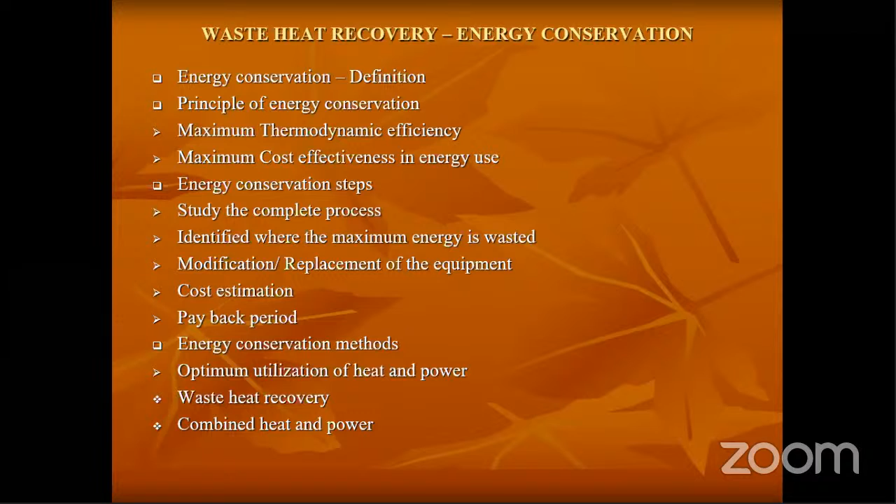Sir, say it once again. There are three switches present on the ground floor. Okay. You can go and see the switches. Now you go to the first floor. There are three bulbs present. You must say which switch corresponds to which bulb. I'll give you only one chance to see the switches, and you will not come back. Three bulbs are fitted on the first floor, three switches on the ground floor. Do whatever you can with the switches, but you must say which switch corresponds to which bulb.

Okay, so I will tell you the answer. The concept is waste heat recovery or combined heat and power. I go to the switches. I switch on the first switch, wait for 5 minutes, switch it off and switch on the second switch. Now I go to the first floor. The bulb that is burning corresponds to switch 2. Now you touch the surface of the other two bulbs. Whichever bulb surface is hot, that is switch 1, because I switched it on for 5 minutes, then switched it off.

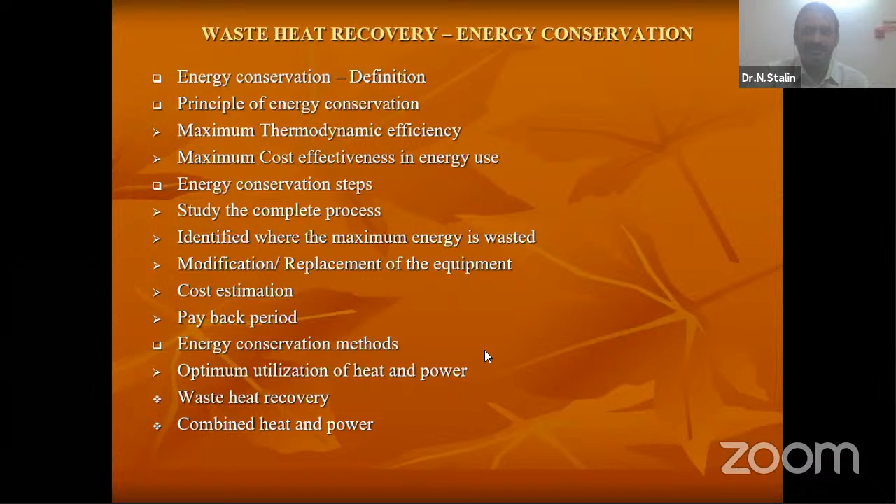Wherever you have waste heat, that has to be utilized as a useful form of heat. Waste heat recovery in industry is classified into three ways: high temperature range, medium temperature range, and low temperature range. The high temperature range is above 1200 degree Fahrenheit. Medium temperature range is 450 to 1200 degrees. Low temperature range is below 450 degrees Fahrenheit.

This is how the amount of heat emitted from different sources is classified based on heat available. For example, high temperature waste heat is available in aluminum refining furnaces and solid waste incinerators. Medium temperature waste heat is available in heating furnaces and gas turbine exhaust. Low temperature waste heat is available in cooling water from internal combustion engines and process steam condensate.

If you take your home, when staying in an apartment house, you can put one collection point in every home. Whatever coconut is used, every home uses coconut. After taking the inside part, they throw the coconut shell. The coconut shell has higher calorific value compared to any other fuel. You can use this coconut shell and make a small boiler at a cost of hardly 2000 rupees, an aluminum boiler is enough.

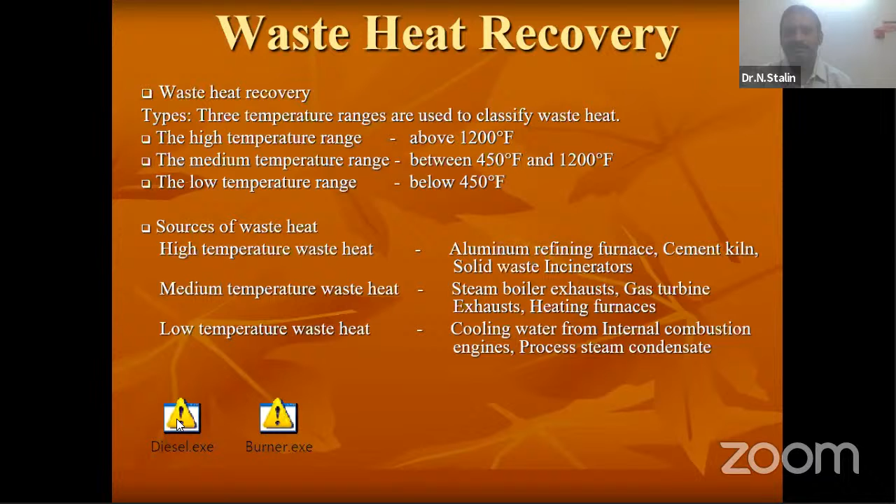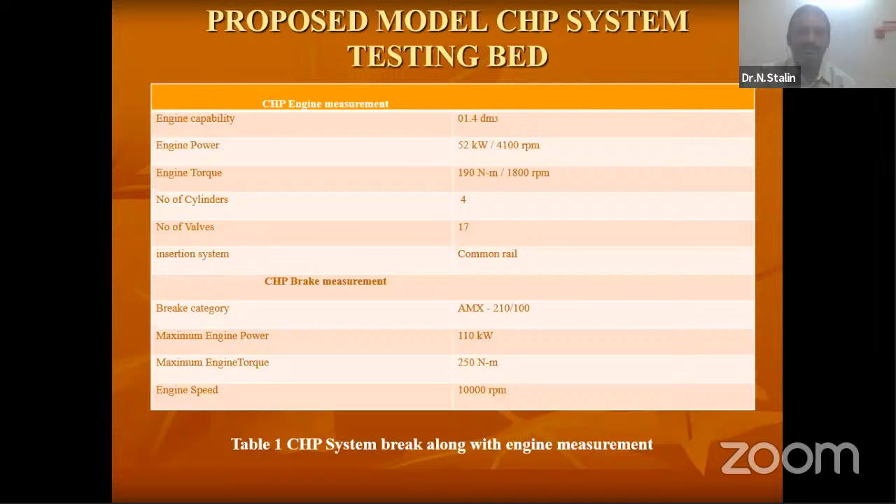Now in industry there is a diesel engine. Day by day you are using a diesel car or whatever transport. This model which I proposed for reducing pollution to the environment has a CHP engine capacity of about 1.4 dm3, and engine power of 52 kilowatt at 4100 rpm. In this engine bed, to reduce the waste heat, I put a heat exchanger.

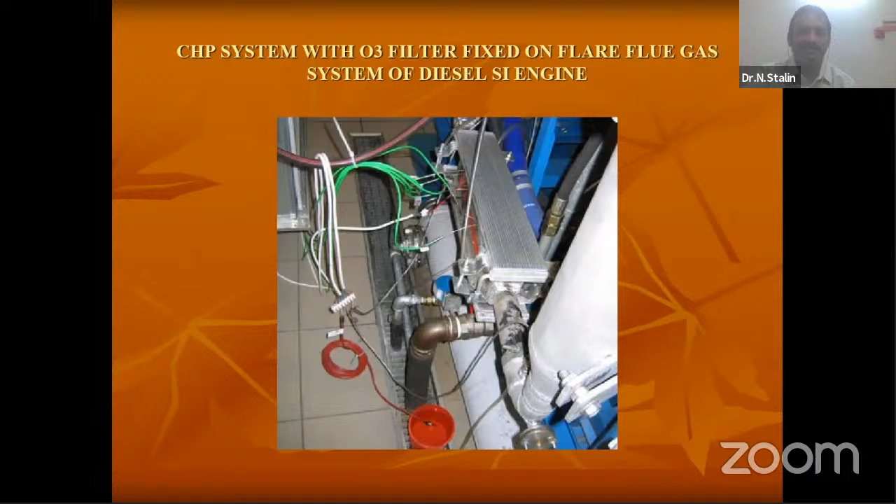That heat exchanger is used to recover the heat. This is a view of this heat exchanger, used to recover the heat, and that heat can be used for converting our tap water into distilled water. Once you have a diesel car at home, based on the flue gas outlet, I designed a shell and tube heat exchanger. I fitted that shell and tube heat exchanger at the outlet of your exhaust without affecting the flow of exhaust. Because of that, I chose a shell and tube heat exchanger, so this heat can be used for converting your tap water into distilled water.

So there will be a small tank I have provided. It acts like a condenser. Whatever tap water is provided inside the heat exchanger gets heated up. When you run the car, it gets heated up and converted into steam. That steam moves to the top, and the condenser condenses it. The liquid accumulates in the condenser, so once you stop your car, using the drain valve, you can take the distilled water.

So that calculation I made it. Diesel engine thermal efficiency is 40%. The available heat is 60%. Diesel car has an air fuel ratio of 15 is to 1. So mass of the exhaust leaving from the engine is 15 plus 1, 16 kg of flue per kg of fuel. The engine exhaust temperature is 600 degrees centigrade.

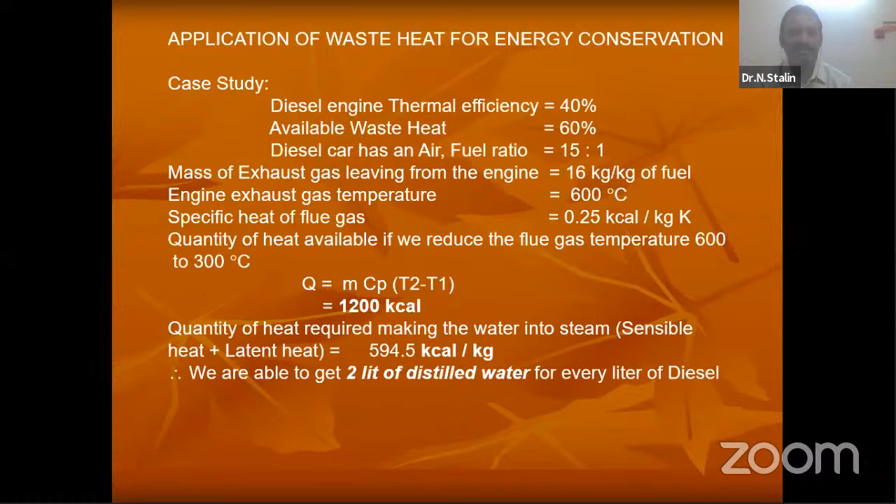The distilled water cost is 20 rupees, so 2 liters is equal to 20 plus 20, 40 rupees. Your 1 liter cost of diesel is 75 or 70 rupees you take. So 40 rupees is a saving. The remaining 30 rupees you have to save in your pocket.

So like that, you can do this type of energy saving concept in your home also. So what way can you do the energy conservation concept?

Most probably people find it very difficult to get LPG gas, liquid petroleum gas, because it is kept in a 14.2 kg cylinder, and people feel the gas consumption is high. Normally the cylinder has to last 60 days, but now it's coming to 15 days. The cylinder gets over because during the corona period, everyone is staying at home and the consumption is high.

So how can I control the consumption and flow of LPG usage? One method is, as per the law, when there is a flow of fluid inside a tube, if you provide a magnet over that, an EMF is produced. So once there is a flow of gas, if you make a magnetic field over the flow of gas over the tube, then the flow becomes very slow as it moves from the cylinder.

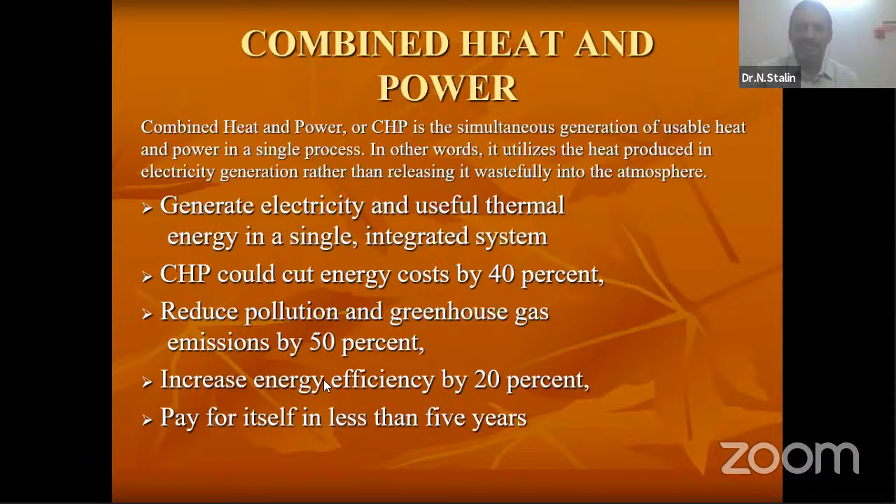The first one is to generate electricity and useful thermal energy in a single integrated system. By using the exhaust heat, you can also reduce the energy cost by 40% and reduce the pollution. Once you recover the waste heat, you can reduce the pollution by 50% and increase the energy efficiency by 20%. These are all the effects of combined heat and power.

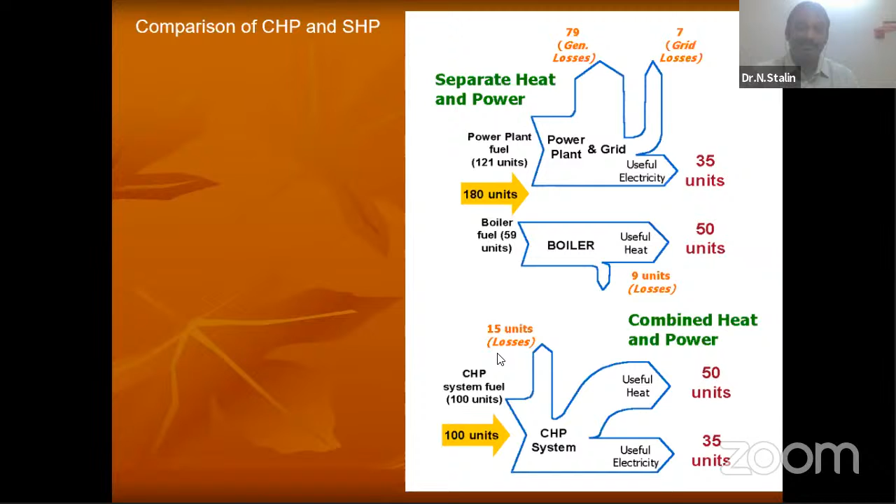Whereas if you use only 100 units of input in the CHP system, the output you are getting is 50 units of heat and 35 units of power. So the given input is only 100 units, and here you are getting 85% efficiency. So CHP, combined heat and power, is the best compared to separate heat and power.

This is traditional versus micro CHP system. In a traditional system, you can get only 57% efficiency, NOx is 0.2 pound per hour, and CO2 is 120 pound per hour. If you take micro CHP, traditional is only 57%, whereas micro CHP is 75%.

This works based on combined heat and power. NOx is reduced by 10 times, from 0.2 to 0.02. And CO2 is reduced from 120 to 90. So CO2 will reduce, NOx will reduce, and efficiency is improved.

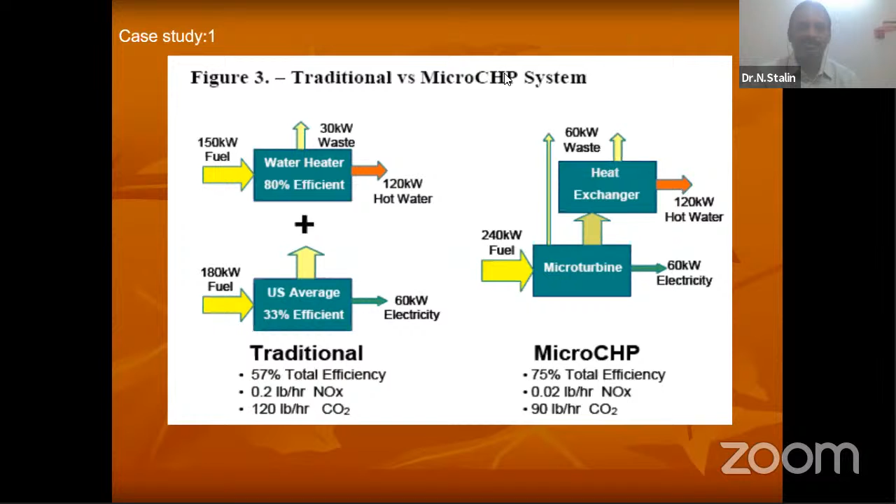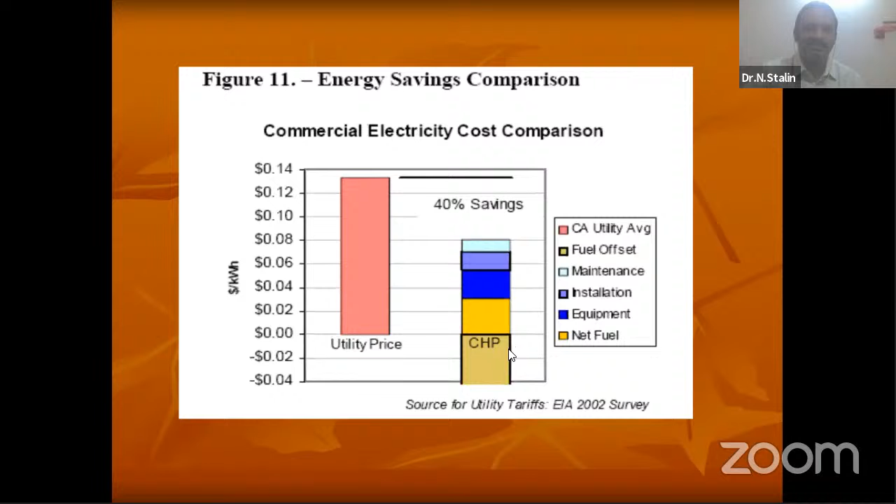So the CHP system is the best system for energy economy. The energy saving concept is that 40% energy has to be saved in CHP compared to the traditional system. This is also the best example of heat recovery, waste heat recovery in industry, for energy conservation.

As you know, people go to attend a marriage or any functional party, and by the nature of the mind or heart, they used to take more food, whether non-vegetarian or vegetarian. What happens is their stomach will bulge 2 or 3 centimeters away from the body. It means naturally, based on tendency or taste, you are having more food. So what happens is you feel indigestion because you are taking more intake.

So what way can you digest the food easily? Either you can use some ingredients like vethelai as a catalyst, or you can use hot water, or you can use some carbonated drinks like Pepsi, Coke, or anything, so it gets digested easily.

So the principle is, whenever you take food, if you want it easy to digest, the catalyst, as an example in your body's concept, the renin or the saliva is very important, and the temperature is very important. When the climate is more cold, you feel, sir, I just now took food, but it will not get digested.

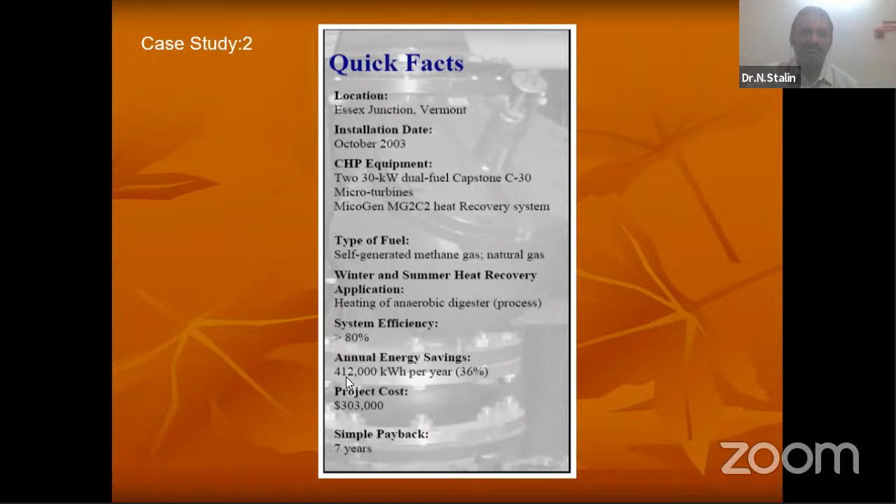So like that, the CHP system is used for preheating or increasing the heat of the anaerobic digester, and also the production of gas is high. By using the waste heat, the annual saving is about 4 lakh 12,000 units of electricity per year. The cost is almost 3 lakh 3,000, and the payback is 7 years.

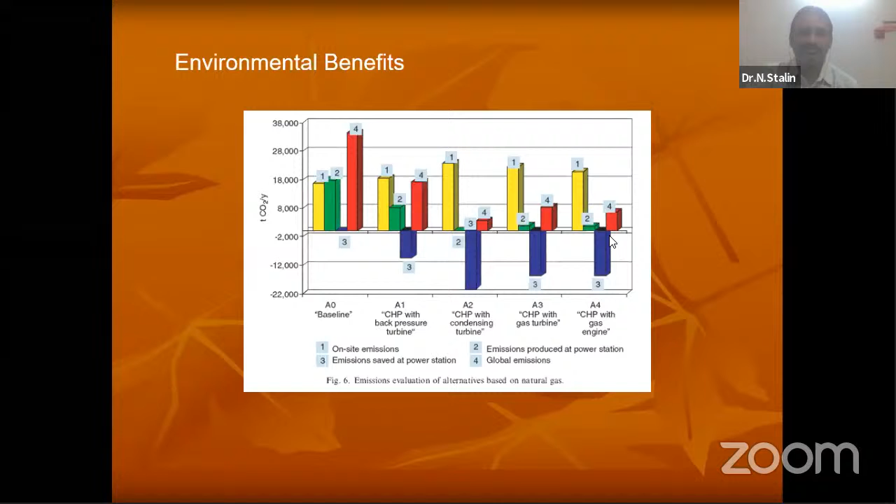And also, when you take the CO2 emission to the atmosphere, if you use a CHP system, the CHP with back pressure turbine, CHP with condensing turbine, CHP with gas turbine, see these blue lines are CO2 emissions prevented. So this is the best one, the CHP method. So this is a combined cycle process.

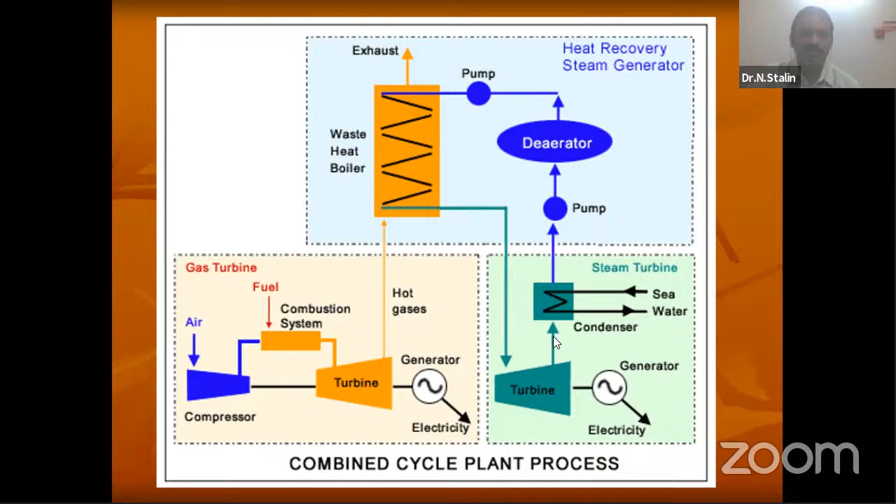You are extracting the waste heat available from the turbine and using it for production of distilled water, and also steam generation. This generated steam is used for converting into power. And this waste heat available in the boiler is used for preheating buildings in foreign countries. And this is a cogeneration power plant, the CHP, combined heat and power.

Say an example, in the sugar industry, people take the sugarcane, take out the sugar juice and put it in the boiler. In the sugar mill, the waste they generate is bagasse. So what is bagasse? Bagasse is one of the solid wastes produced in the sugar industry. This solid bagasse is used as a boiler fuel, and using the bagasse they generate steam. That steam is used for production of power.

So all the sugar industries do not belong to the Tamil Nadu Electricity Board or any electricity generation board. The company itself generates the power, and the power is utilized in running the sugar industry. And also, if there is excess power, it has to be supplied to the grid.

Okay. See now, as I know, the fermentation process happening in Tamil Nadu is in one of the hectic positions because of quick fermentation. In the sugar industry, the molasses waste goes to the production of alcohol. But alcohol production is an autocatalytic reaction. The autocatalytic reaction requires 30 days to complete. So if you want complete production of alcohol, you need to provide 30 days time.

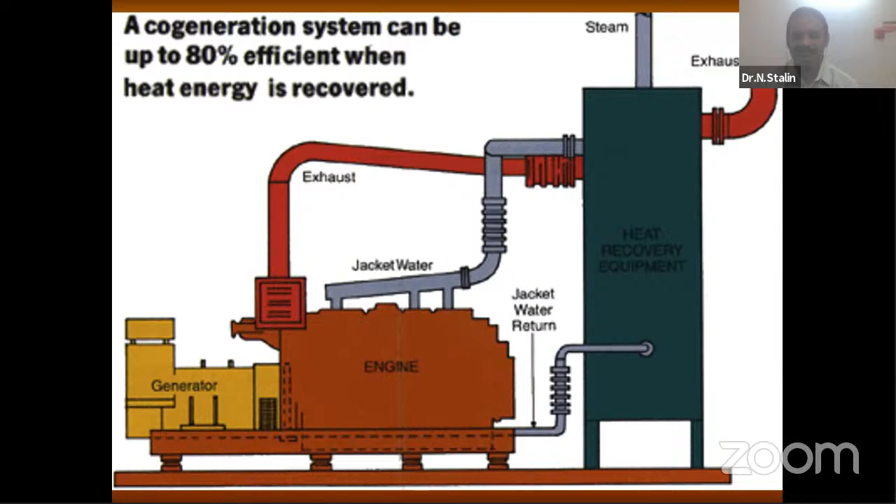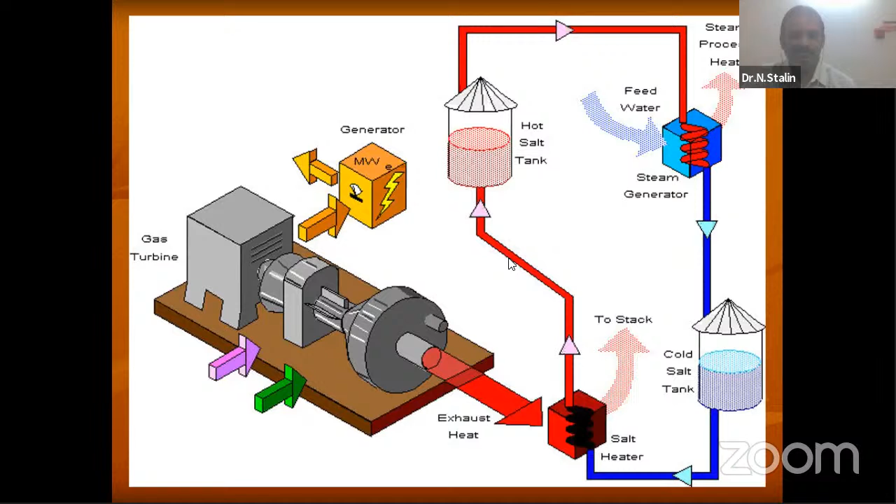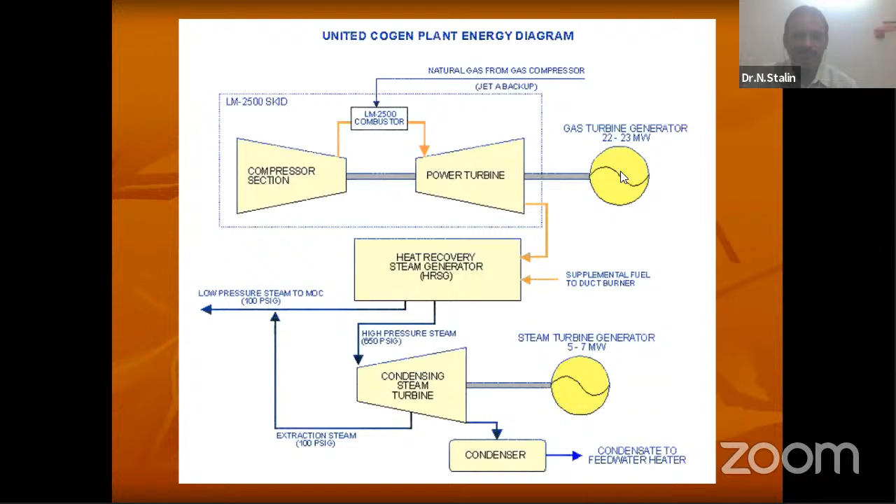So compared to these, the overall efficiency is improved by 10%. So these are the three systems used for energy conservation: one is a reciprocating engine, another one is a fuel cell, and the micro turbine. In the reciprocating engine, the input is only 100 units. You are getting electricity 40 and heat energy 50.

Instead of reciprocating, if you go for separate heat and power, you have to spend 200 units of input for a given 100 unit input. So it is almost doubled if you go for separate heat and power. Like that, in the fuel cell the given input is 100; here it is 197, but the output is the same. So in separate heat, instead of 100, it is doubled.

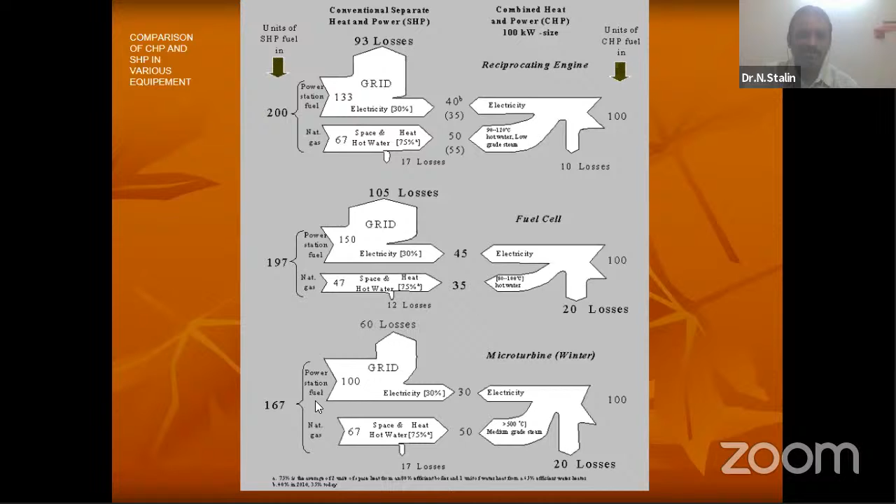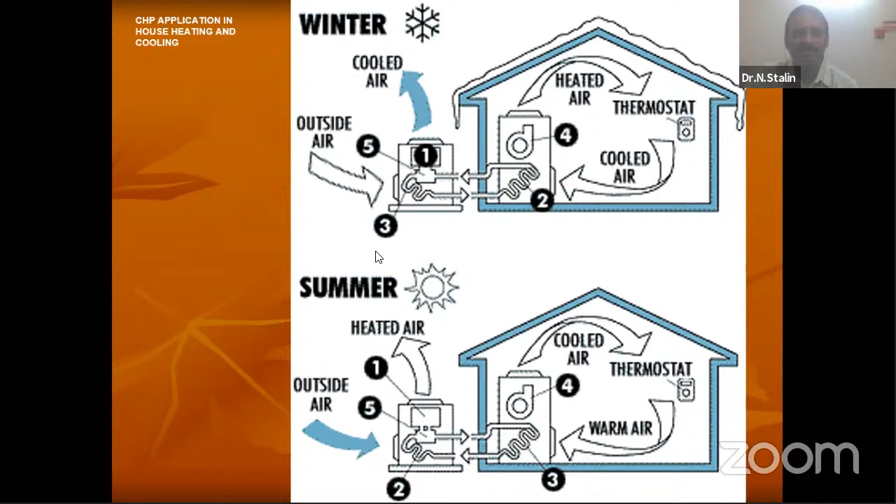Like that, in the micro turbine, the given input is 100; where it is separate, it is 167, but you are getting the same output. So compared to all in the process, the best is a CHP system, combined heat and power system. Whatever exhaust is available is used for heating the building, or by using the heat engine you can cool the building. So two ways you can do it. This is one energy conservation opportunity in industry.

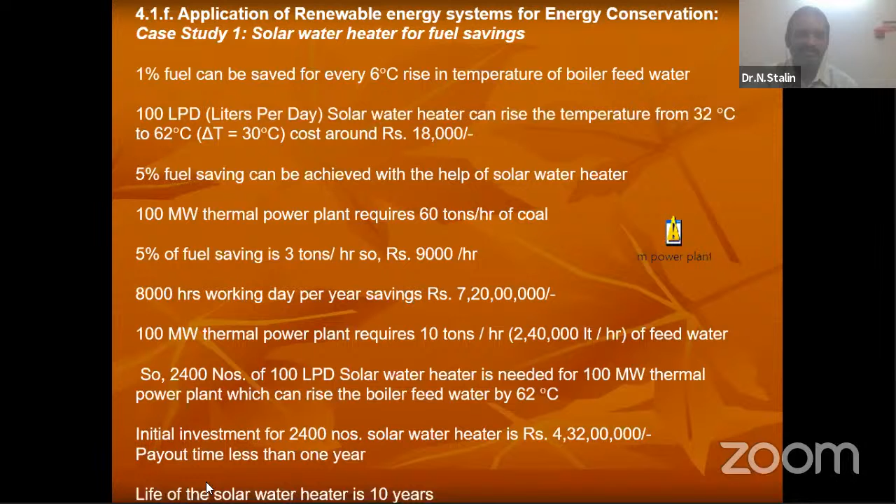Whenever you use a thermal power plant, the inlet temperature has to be raised from 30 to 60 degrees. We are using a solar water heater to increase the temperature from 30 to 60. The investment is 4 crores 32 lakhs, and the saving is 7 crores 20 lakhs. So initial investment divided by saving, the payback is less than 1 year. This is a way you can do energy conservation in industry. And this is very important.

Solar photovoltaic system. Suppose you want to put solar electric power generation in your home. Nowadays, the government has given subsidy. You can put it in your home or in an irrigation field also. In the irrigation field, in Periyar Maniammai University, they already established this solar power system. They have a solar park also, a solar gasification system, and a biogas plant also.

So like that, you can make solar power generation in your home, and in your irrigation field you can put a maximum of 5 HP solar pumping system, and for that the government has given subsidy. This is a small calculation I made for putting a solar photovoltaic. For example, in your home you use fridge, fan, TV, mixie, grinder, tube light, pump, iron box, and you use the fan 10 hours and TV 6 hours.

Based on the optimal calculation, your total unit consumption is about 4 units. So I need to get 4 units of power to my home. For that I have to design a solar panel with peak power output of 80 watts, and 11 solar panels are required. The working hours per day is 6 hours, and the number of working days per year is 300. The electricity produced: 11 panels, 60 watt peak power output, 6 hours working, so 3960 watts, approximately 4 units.

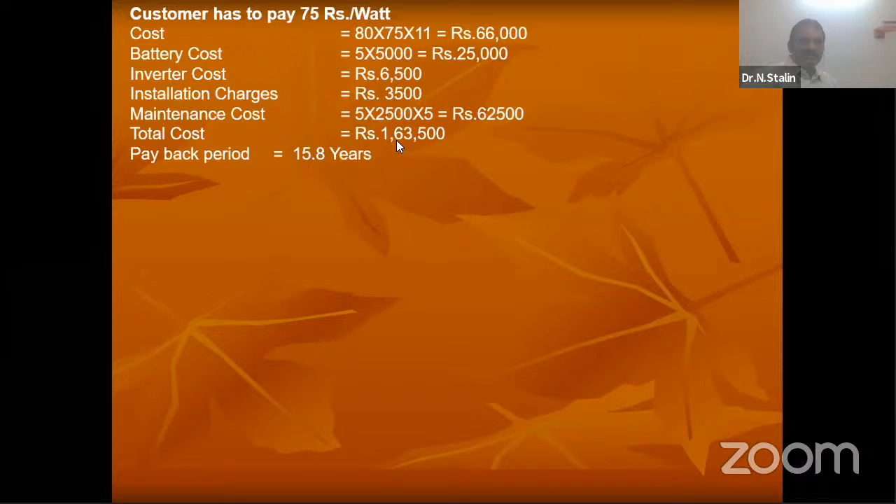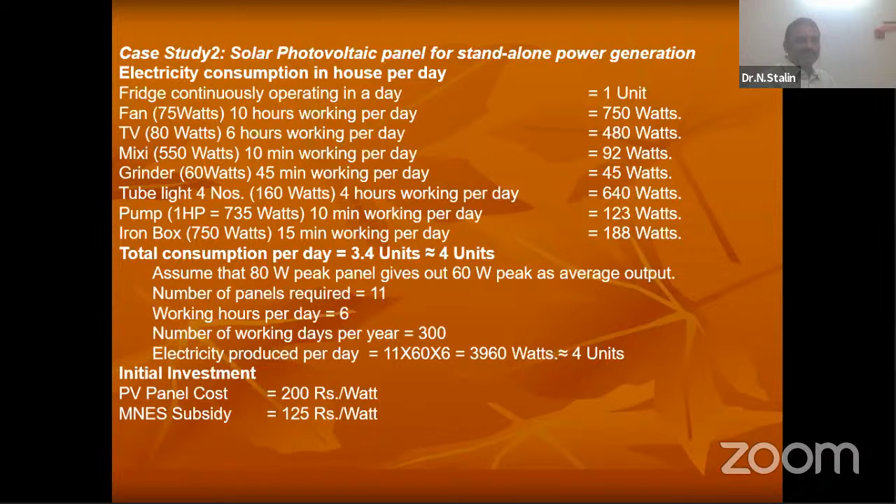For that, the complete cost, panel cost, battery cost, inverter cost, is about 1,63,000. Now it is raised to 2 lakhs. This is the initial investment. My production is 4 units per day, so 30 days, 120 units, 120 into 5 rupees. Like that I calculated the cost per unit, electricity saved, cost saved, and units produced in the plant.

Because if you want to get 1 unit of electricity here in Neyveli, you have to produce at least 1.5 units. Through the line there will be line loss, I squared R loss. So I have to take 25% loss into account. That is also the units produced in the plant. And CO2 prevented in the atmosphere.

If you produce this much electricity with a solar panel, how much CO2 emitted to the atmosphere is prevented. Because when you want to produce electricity using coal, you need to burn that coal, and only after burning can the heat be extracted for converting water into steam. So there will be CO2 emission to the atmosphere.

So if you produce with the solar, how much CO2 emission is prevented. So I have to calculate the savings with respect to the unit cost. So it comes to a 15.8 years payback period. But you have to spend 2 lakh rupees.

Why, still now, are people not willing to purchase the solar photovoltaic system? Because the problem is the payback period. The payback period is 15.8 years, almost 16 years approximately. So if you put 2 lakhs in the bank, the interest offered by the bank is 1%. It's almost 2000 rupees per month.

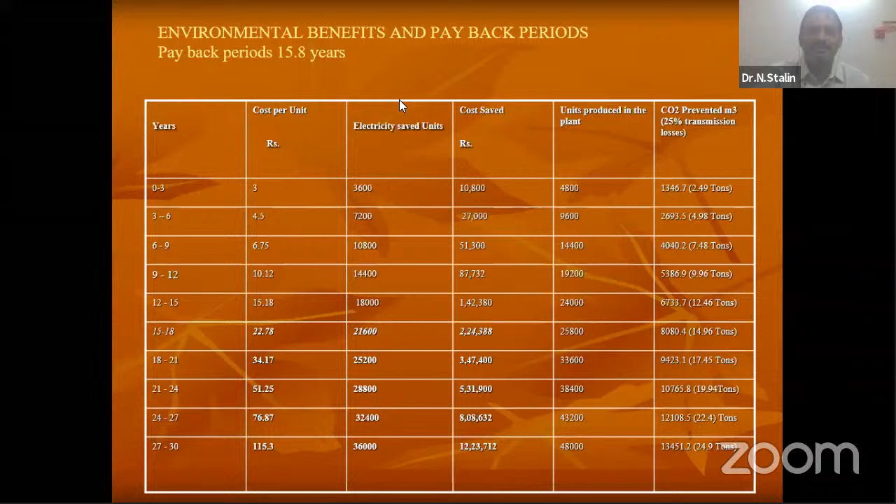The main thing is seasonal variation. The sunshine you will not get 300 days, hardly 4 to 5 months. So energy conservation by waste heat recovery is a very good idea to reduce the pollution to the environment by 50%, minimize the energy consumption by 70%, and maximize the cost effectiveness in energy use and optimum use of heat and power.

So when you talk about your home, the first thing is your TV. Say, for example, if you are using a TV, you should not switch off only the TV with your remote. You switch off the plug also, because it consumes some electricity internally. And you are using an inverter. Each inverter, for example, 2 kilowatt means 2 unit capacity of inverter.

In Tamil Nadu there are almost 1 crore families. Say, for example, 1 crore families, 1 crore into 2 kilowatt. You just calculate how much energy is stored unnecessarily. Okay, so you should not store the electrical energy, except for a standalone system. And in what way can you effectively utilize it? If you use a battery system, that battery itself consumes some energy.

See, you take food in your home and you are in sleeping mode. Even in sleeping mode, the body requires 50 calories of energy. So like that, when you keep the battery in a standalone position, running the internal circuit itself consumes some energy. That is true for your mobile or any battery system. Once your mobile is switched off, immediately you should charge the battery. If you keep it for 2 days, it becomes dead, because internally the circuit wants to run.